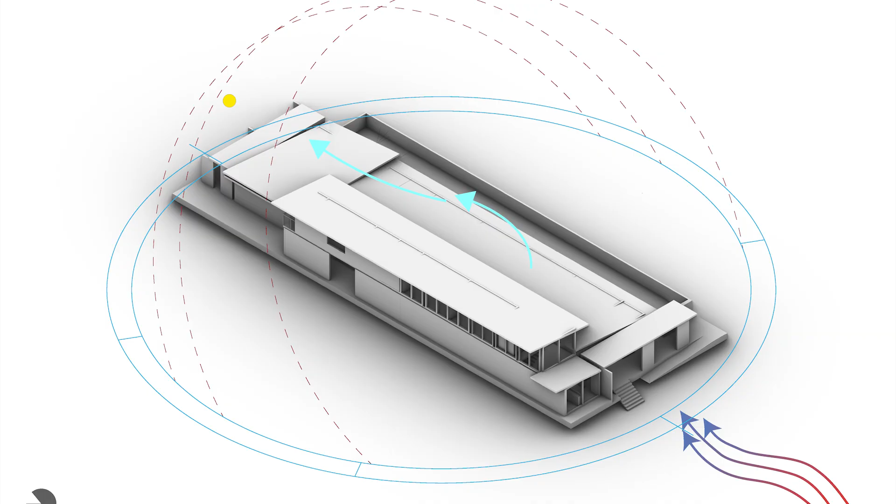In Marina del Prat Vermell, rapid urban development, traffic infrastructure, industrial remnants, and increasing heat conditions create environmental stress that disproportionately affects children and families. The project Breathing the Block investigates how architecture, ecology, and urban systems can work together to create a regenerative nursery environment that filters pollution, reduces environmental stress, and reconnects children to natural cycles through everyday spatial experience.

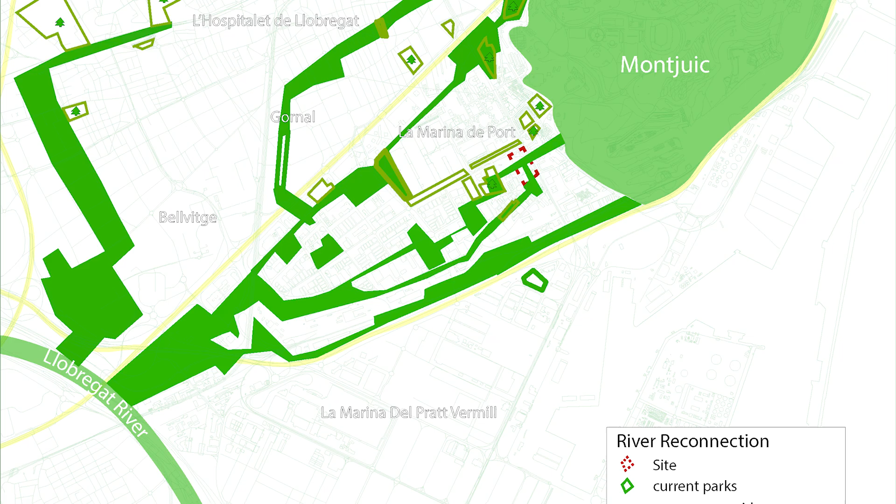Rather than treating architecture as an isolated object, I approached the project as part of a larger living system operating across territory, ecology, community, and atmosphere.

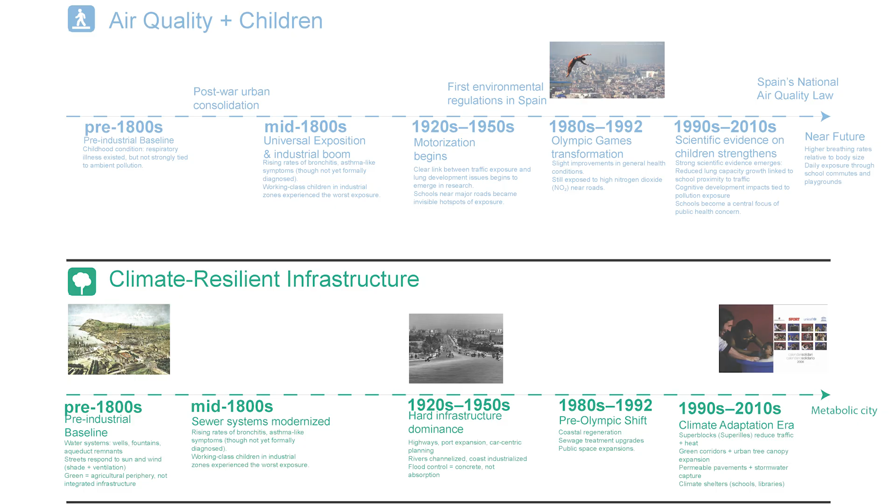To understand the site, we must first look at the history of the Llobregat River and Marina del Prat Vermell. Historically, the Llobregat Delta functioned as a productive agricultural landscape, shaped by water systems, fertile soil, wetlands, and ecological diversity. The territory operated through regenerative cycles. Water nourished crops, vegetation stabilized the landscape, and ecological systems supported human settlement.

Over time, industrialization transformed the delta into a fragmented infrastructural territory dominated by roads, logistical factories, and hard urbanscape. As industry expanded, ecological systems became disconnected, natural water cycles were interrupted, green spaces became diminished, heat accumulation increased, and air pollution intensified. Today, Marina del Prat Vermell represents a rapidly developing district positioned between the industrial infrastructure and a new residential growth. This condition creates both challenges and opportunities.

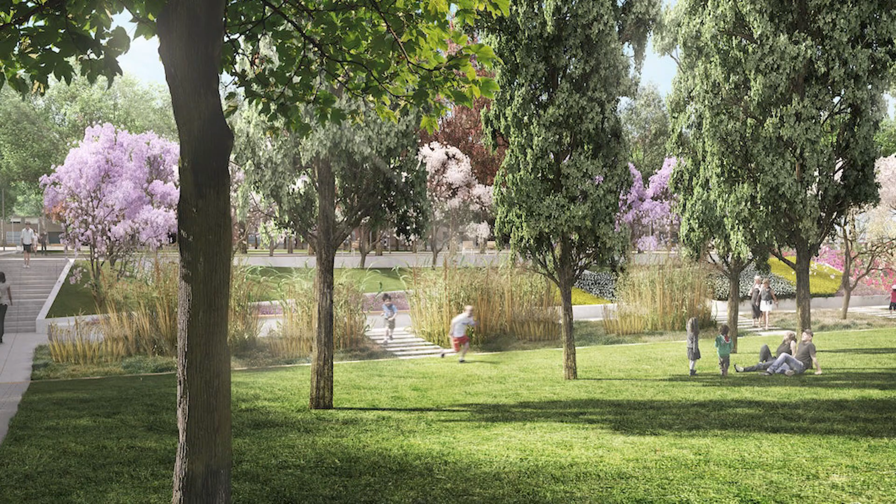The project asks, how can architecture restore the ecological relationship within an urbanized environment? How can a nursery become part of a larger regenerative system?

Research focused on the relationship between air quality, childhood development, accessibility, and environmental stress. Children are especially vulnerable to air pollution because they are physically closer to vehicle exhaust and are developing cognitively and physiologically. Research also demonstrates that access to nature improves concentration, lowers stress, supports emotional development, and strengthens social well-being.

At the same time, many contemporary urban environments disconnect children from ecological systems through heat islands, limited vegetation, traffic exposure, and privatized public space. This creates a condition where environmental inequality becomes spatially embedded into daily life. The city itself becomes difficult to breathe.

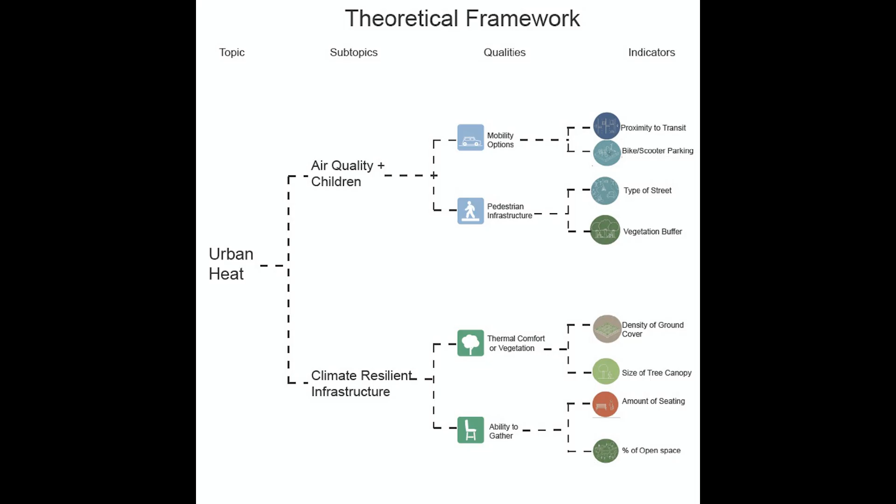The project combines fine-grained urbanism, phenomenological design, and regenerative ecological thinking. Rather than designing only at the scale of the building, I focused on the scale of everyday experience: walking, playing, resting, learning, and gathering. I became interested in architecture as a sequence of atmospheric conditions.

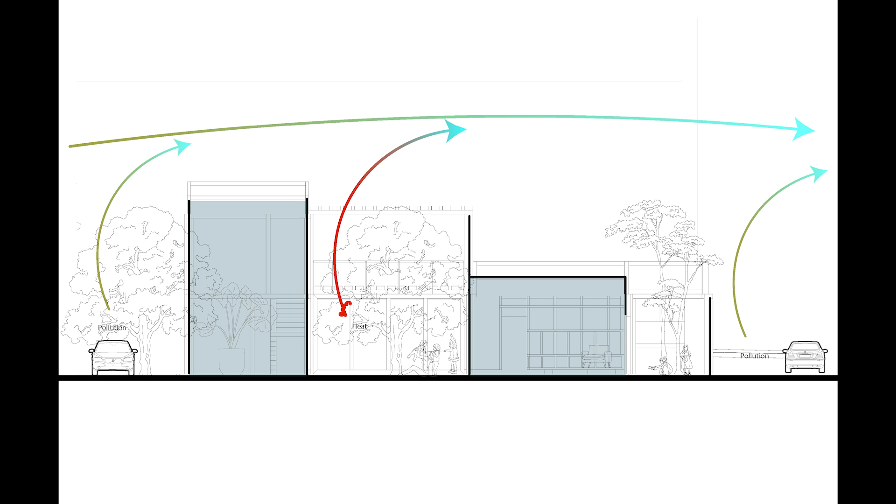This led to the central concept of the project, the city as a living filter. In this framework, vegetation, water systems, building envelopes, courtyards, and public space operate together to slow, cool, filter, and regenerate the urban environment. Ecology is not treated as decoration, it becomes infrastructure.

Biophilia became central to the project because children form early emotional and sensory relationships with the environment through direct interaction with nature. Trees, planting systems, filtered daylight, water, shade, airflow, and natural materials all contribute to healthier psychological and physiological environments. Vegetation also performs environmentally. Planting systems can help reduce particulate matter in the air, provide evaporative cooling, reduce urban heat accumulation, soften sound, create habitat, and improve pedestrian comfort.

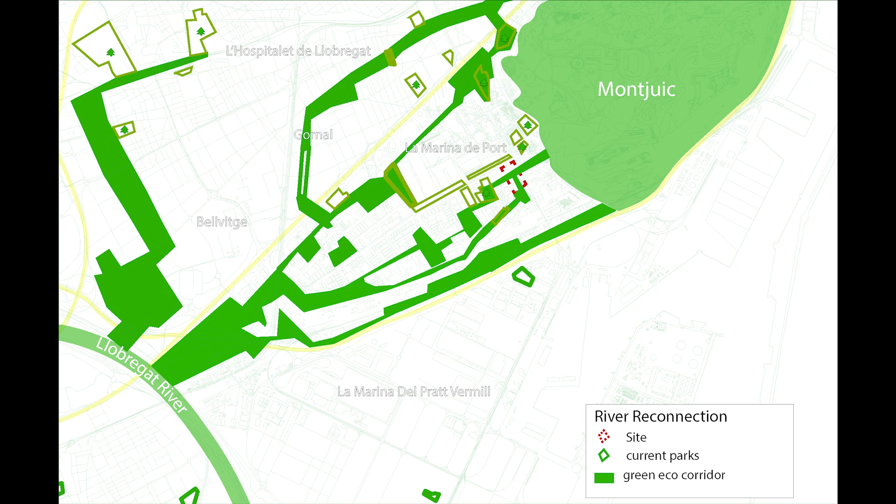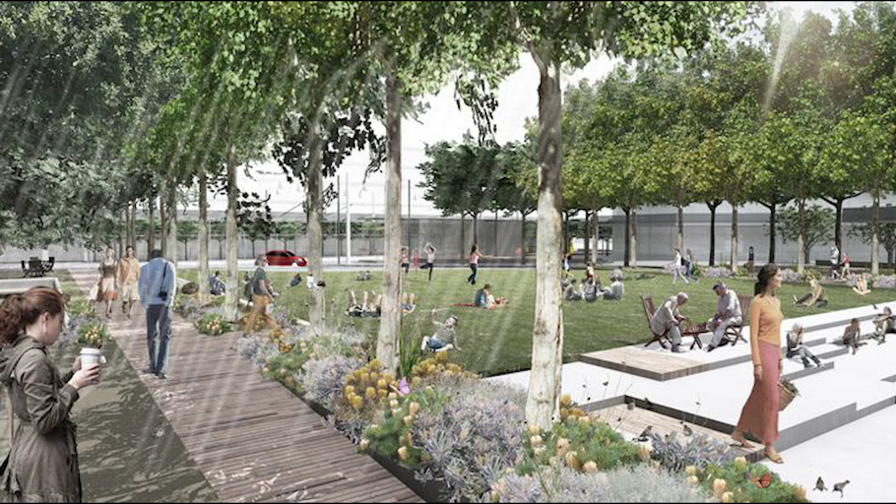The project uses layered vegetation systems as environmental filters positioned throughout the site. Green corridors extend through the district and connect the nursery to larger ecological networks. The nursery becomes part of a chain of cool islands and refuge spaces distributed across the neighborhood. These green corridors reconnect fragmented urban conditions while supporting both ecological and social regeneration.

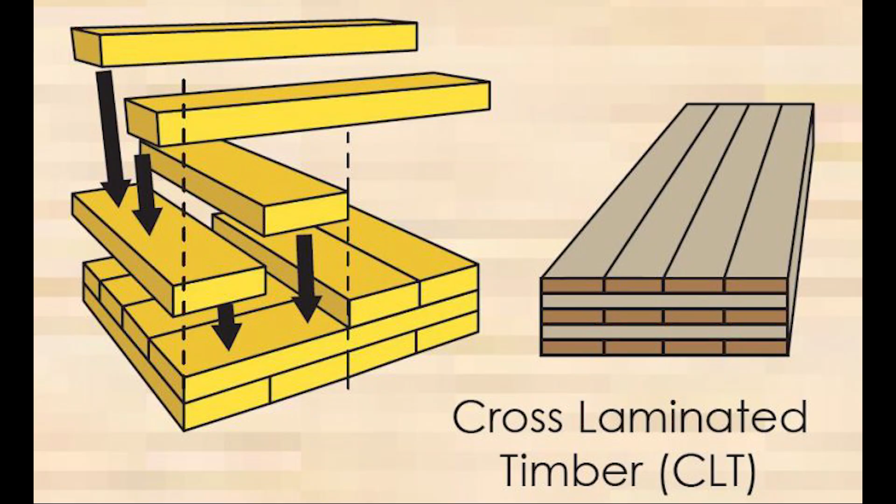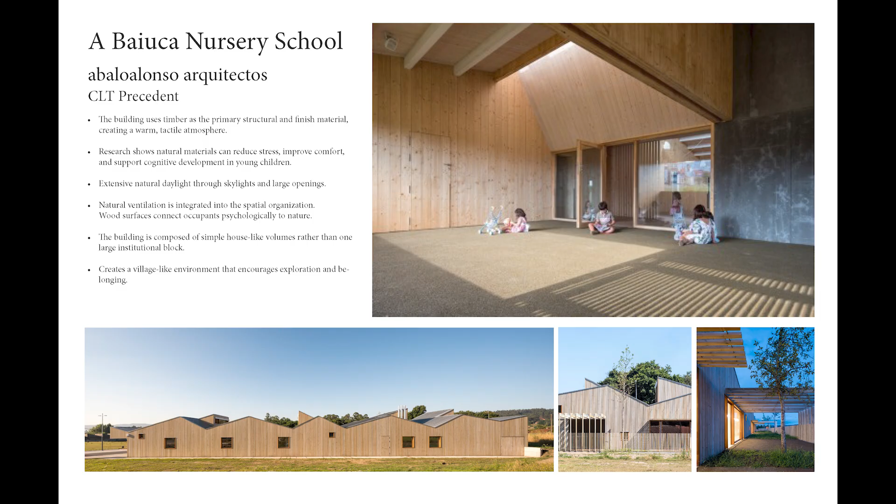Cross-laminated timber, or CLT, was selected as the primary structural system because it aligns with the project's environmental, spatial, and sensory goals. CLT reduces embodied carbon compared to conventional concrete construction and supports prefabrication, efficiency, and adaptability. But beyond sustainability metrics, CLT creates a warm tactile environment that is especially important for early childhood spaces. Wood changes the atmosphere of a room. It softens acoustics, reflects warm light, creates sensory comfort, and establishes a closer relationship between the building and natural systems.

Structurally, the CLT system allows the project to operate as a porous environmental framework rather than a sealed object. The building opens at the ground level to create shaded thresholds, cross ventilation, and continuous movement between interior and exterior spaces. Roof structures extend outwards as a protective canopy that collects rainwater, provides thermal shading, and supports the project's regenerative water cycle. The structure itself becomes part of the environmental performance of the project.

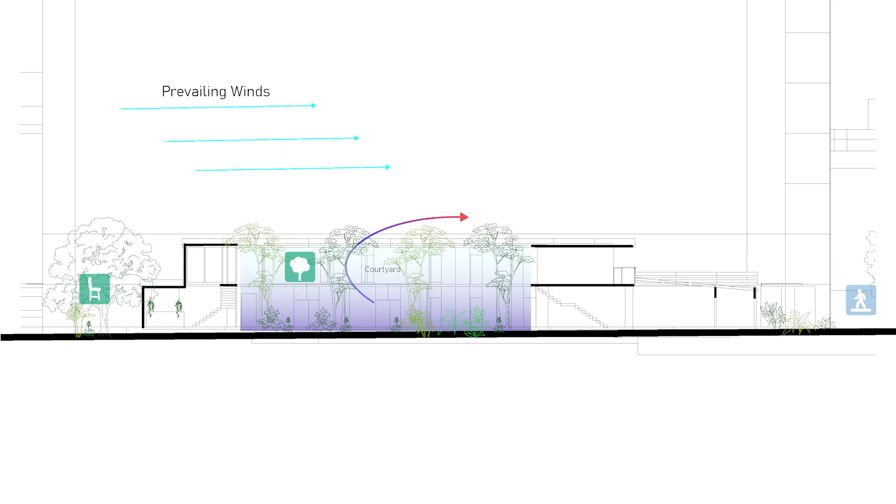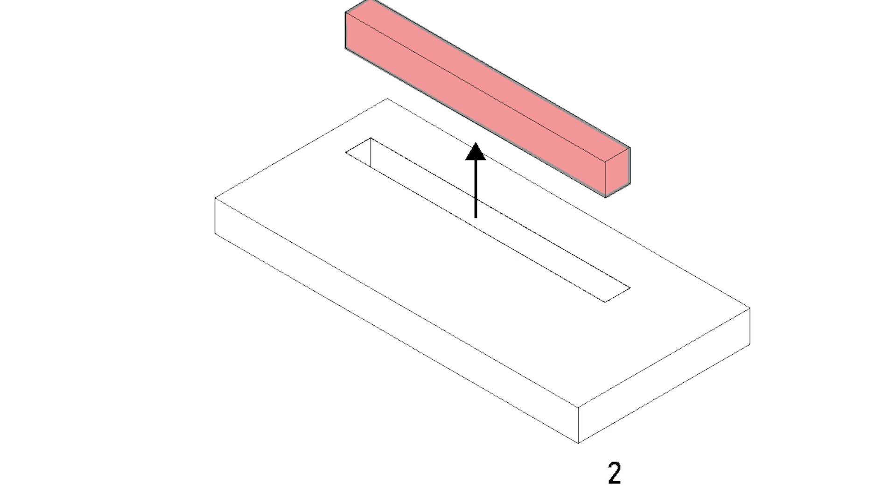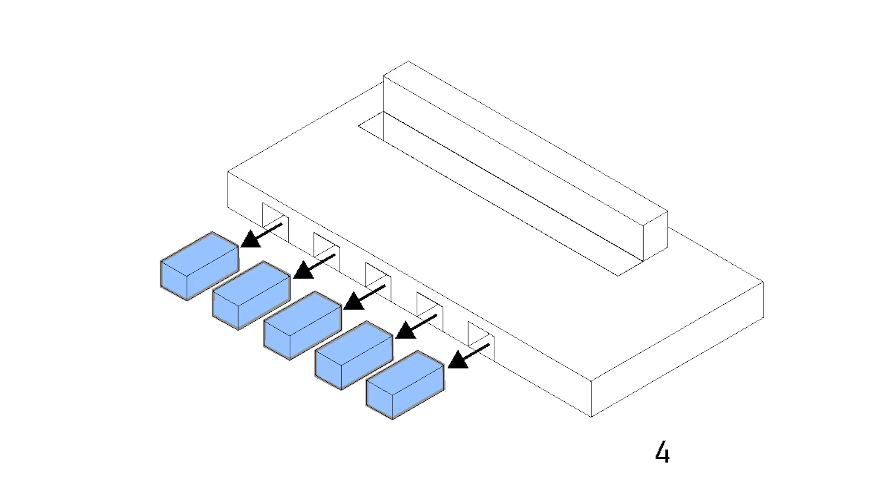The project is organized around several key strategies. The first is environmental filtration. Vegetation buffers and porous public thresholds reduce exposure to heat and air pollution at the street edge. The second is the courtyard as a clean air reservoir. At the center of the nursery, planted courtyards create stable microclimates where children experience filtered light, cooler temperatures, and direct relationships with nature.

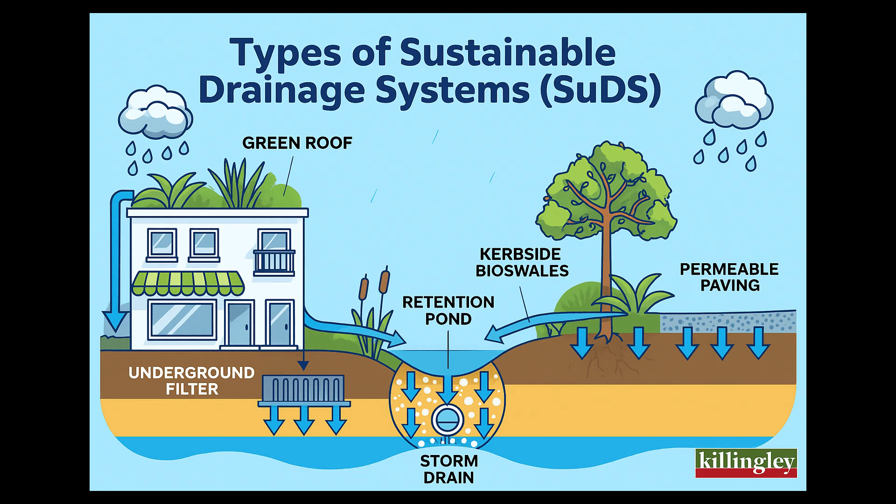The third strategy is regenerative water infrastructure. Rainwater is collected from roof canopies, stored, and redistributed through irrigation systems that sustain planting throughout the site. This restores a visible environmental cycle inspired by the historical hydrology of the Llobregat Delta.

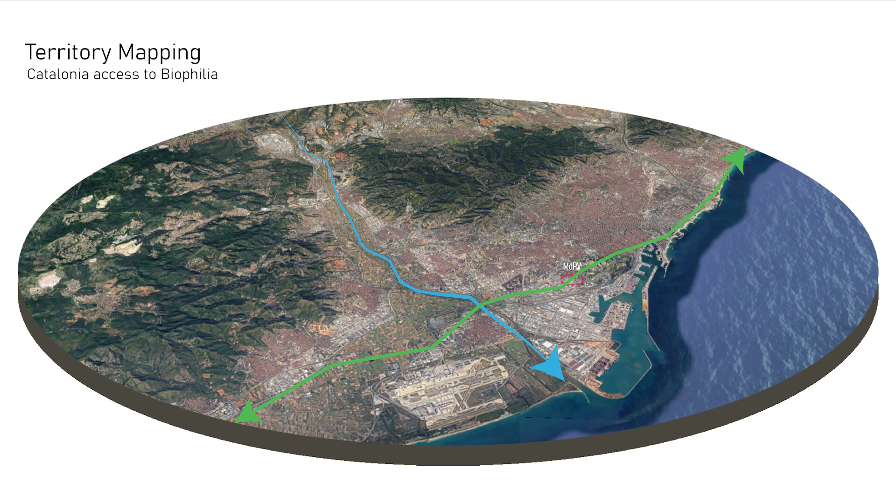The fourth strategy is community integration. The nursery is not conceived as an isolated institution, but as part of a neighborhood ecological network. Public shaded areas, pedestrian pathways, cooling zones, and planted corridors support families and residents beyond school hours.

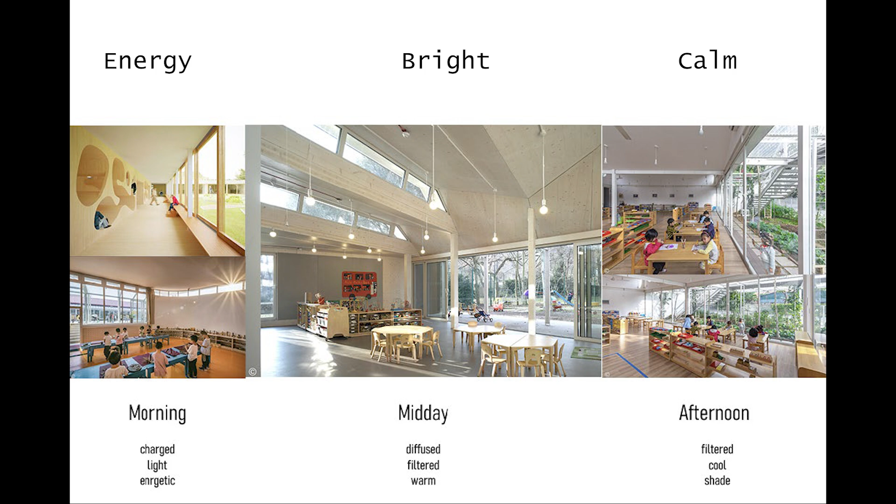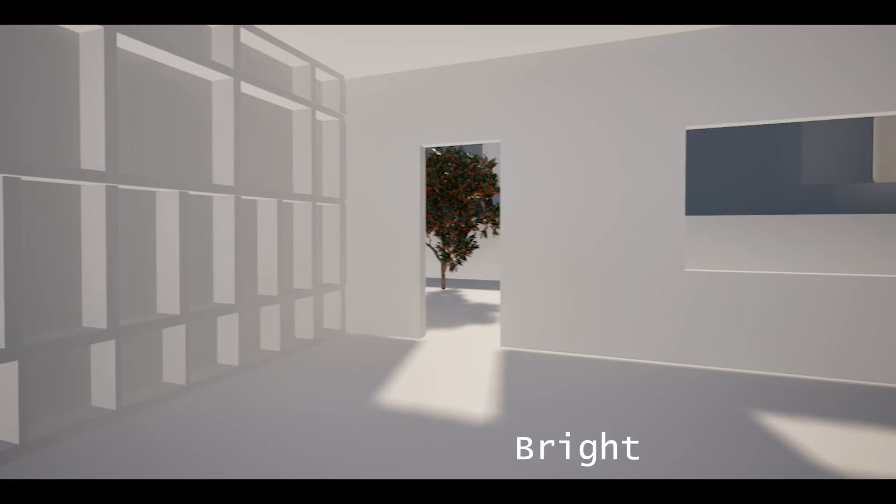A major part of the project focuses on phenomena and sensory experience. I explored how architecture can shape the feeling of moving through the site over time. Morning light filtering through vegetation, air movement across shaded courtyards, warm timber surfaces reflecting daylight, children moving between indoor and outdoor learning spaces. Rather than separating architecture from ecology, the project merges environmental performance with sensory experience. The goal is not only environmental efficiency, but emotional and atmospheric well-being.

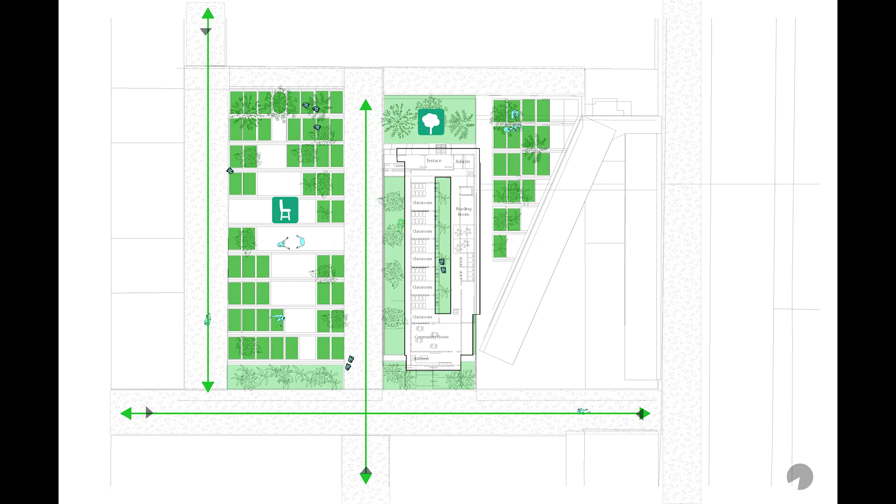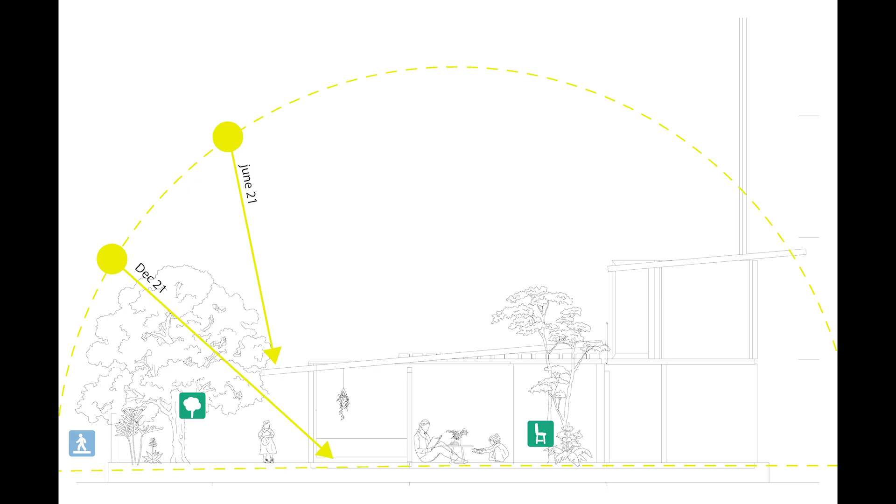Ultimately, Breathing the Block proposes a regenerative nursery where architecture acts as environmental care infrastructure. The project reconnects childhood development with ecological systems while addressing air pollution, urban heat, and environmental fragmentation. By combining CLT construction, biophilic systems, public space, and regenerative water cycles, the project transforms the nursery into both a learning environment and a catalyst for broader urban ecological repair.

In a rapidly urbanizing district, the project asks how architecture can help cities breathe again, and how children might grow up not separated from nature but deeply connected to it through everyday life.